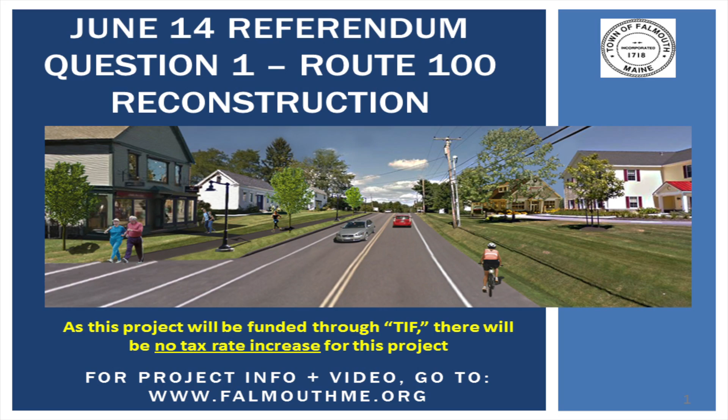Today we want to talk a little bit with you about the Route 100 project. As you know, it's a question on the June 14th referendum, question 1, and we had some requests from people to explain a little bit more about the project, particularly how the project will be financed.

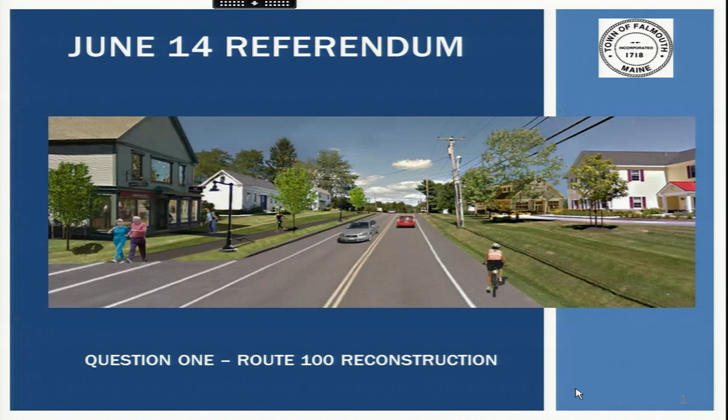We have 3 parts to our presentation: what is question 1 on the June 14th referendum, what improvements are being proposed for Route 100, how much do they cost and how will they be paid for, and lastly when and how is the town going to get the Route 100 project done.

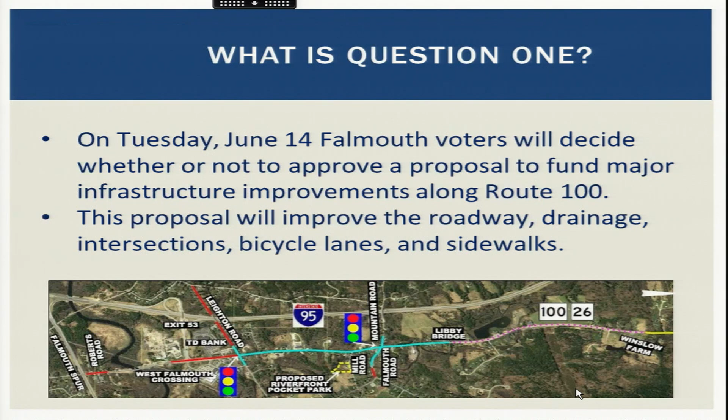So the first part, what is question 1, and what improvements are being proposed. The question simply is for the voters whether or not to approve a proposal to fund major infrastructure improvements along Route 100. Those improvements will consist of roadway work, drainage work, intersection improvement work, bicycle lanes and sidewalks.

What are the current conditions on Route 100? How did this project come about? We have found that the pavement condition on Route 100 has deteriorated significantly. Pavement on Route 100, people may not realize, is very thick, over 3 feet thick of concrete and asphalt that has been added over time. This work was intended to happen in 2009, but it never did because the funds were not available.

This is a state-owned road and the Maine DOT did not have the funds. But in the meantime, Route 100 really is not safe for pedestrians and bicyclists, and the stormwater drainage infrastructure, the culverts underneath the road, have continued to deteriorate. We found that public sewer is not available on most of Route 100. So if Route 100 is going to be reconstructed, it seemed to make sense to add public sewer there as well.

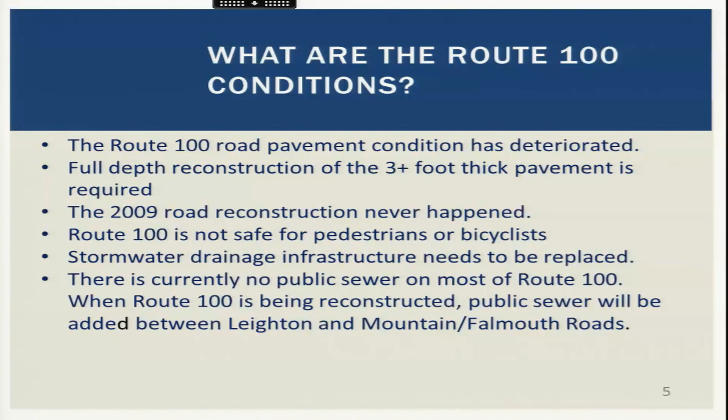So in summary, the town's goals for this project have been fourfold. One is to invest in the infrastructure so that today's traffic and tomorrow's traffic can travel safely along the road. There was an interest to re-establish the sense of neighborhood along Route 100, to be efficient with spending our town money, and to leverage that money with funds from the state of Maine, Maine DOT specifically.

What is the scope of this work? We have a few pictures. The picture shows Portland on the left side of the map, with north running to the right. The key part of the work is to fix the 2 intersections that have traffic signals: the Leighton Road intersection and the Mountain Road, Falmouth Road intersections, with dedicated turn lanes.

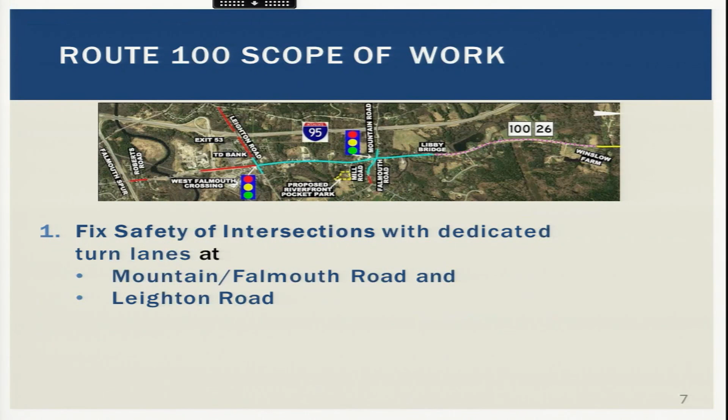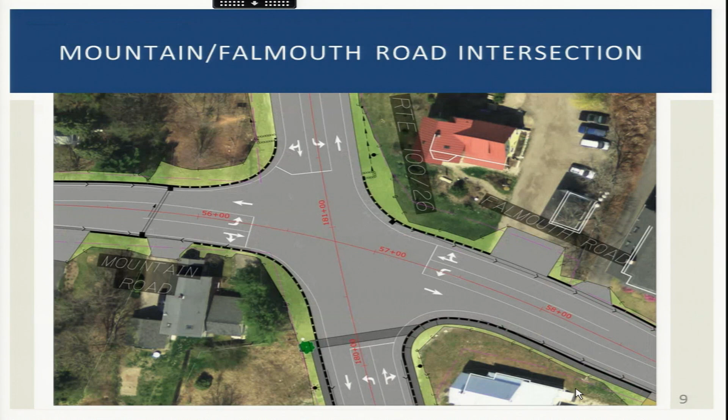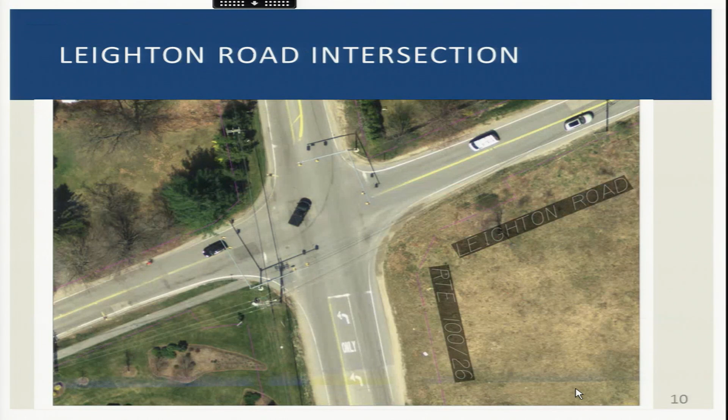Similarly for Leighton Road, this is what it looks like today. You see there's only one dedicated turn lane on Route 100 going left onto Leighton Road, but the proposal would be to have dedicated turn lanes on all 4 legs of the intersection.

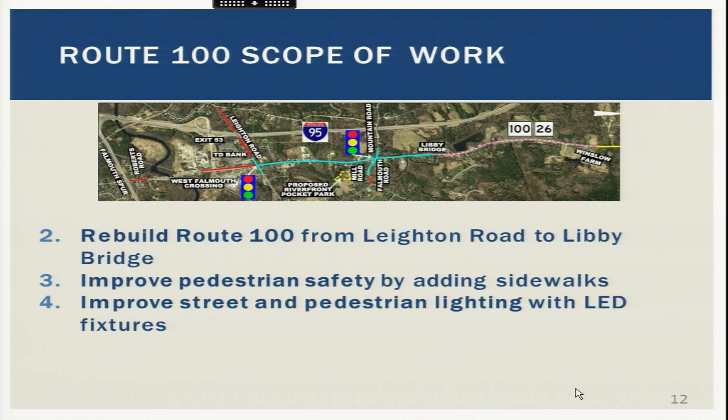Other parts of the work include a complete reconstruction, where you see the turquoise line, of Route 100 pavement from Leighton Road to a point north of Mountain Road that we call the Libby Bridge, to improve pedestrian safety by adding sidewalks. There will be a sidewalk proposed on one side of Route 100 for most of the work corridor.

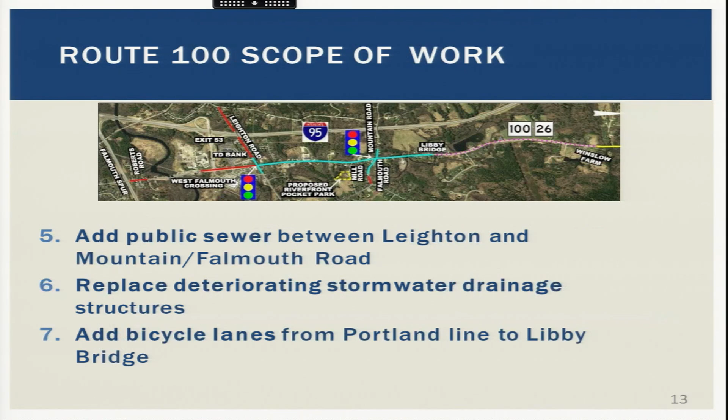Improve street and pedestrian lighting with energy efficient fixtures, and adding, as I mentioned before, public sewer between Leighton Road and Mountain Falmouth Road, fixing the stormwater drainage structure, and adding bicycle lanes from the Portland line, the City of Portland line, to the Libby Bridge. That's it at lightning speed.

The piece that was much talked about by the committee that worked on this project was the section from Winslow Farm to Hurricane Road. That road section also needs work, but it cost $4.2 million and ultimately was decided not to include it because it was too expensive, made the project too expensive, and we could not really afford to do it at this time.

So now we come to the key part of this presentation: how much do things cost and how would they be paid for? The project that the committee and ultimately the town council settled on has a construction cost of about $10.2 million. There are some other costs to the project. One is design.

We had a plan done by Wright Pierce, a concept plan. We had a preliminary plan done by FST Stantec, and that costs money. Also, we propose to bond for this project, which will lead to some interest costs. And those are all identified here in the pie chart.

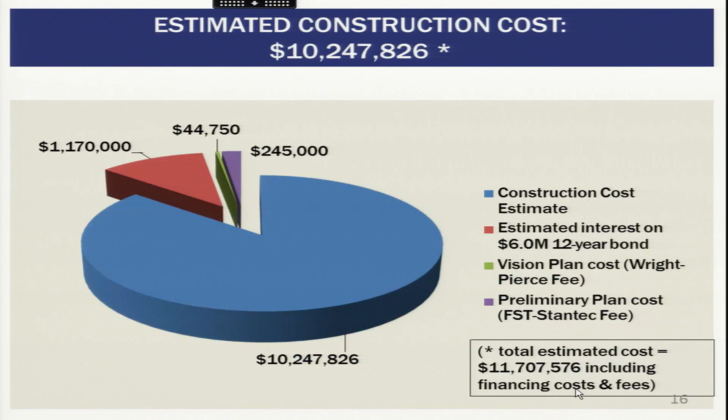What is tax increment financing? That is the vehicle that we propose to use to pay for this project. And people have asked us to explain it in a little bit more detail because it's very technical to some, and people want to wrap their hands around it.

Tax increment financing is typically a specific geographic area in Falmouth. We have currently 4 districts. In West Falmouth, along Route 100, we have something called a tax increment financing district at what used to be called Exit 10. We also know it as the West Falmouth Crossing Tax Increment Financing District. That was established in 1998, for a period of 25 years. It will expire in 2024. It's essentially the complex around TD Bank and Hannaford, which did not exist back in 1998.

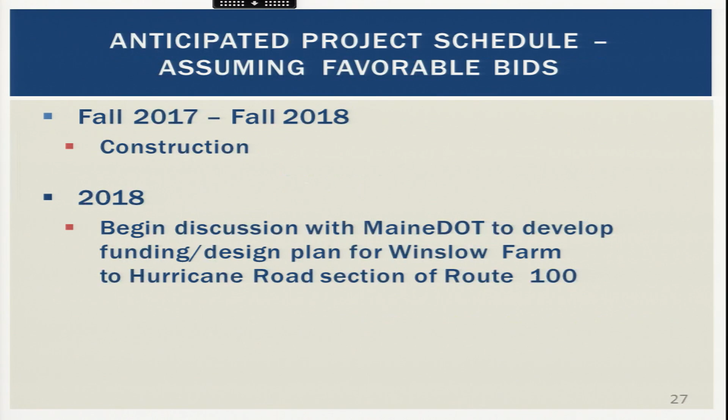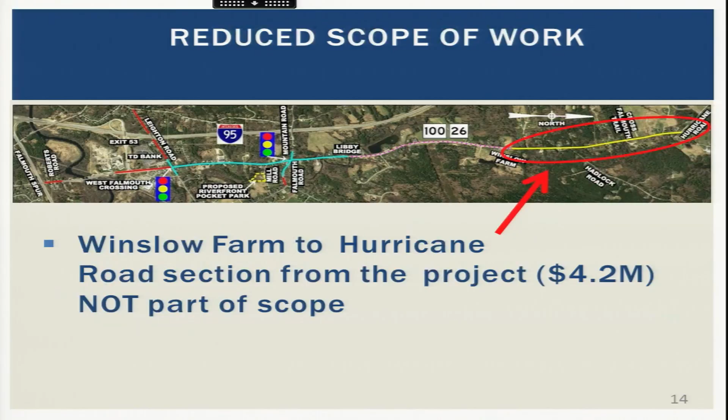Then in 2018, we'll begin discussions with Maine Department of Transportation to develop a design and funding plan for that area of Route 100 that Teo described earlier, a little more than $4 million from the Winslow Farm to Hurricane Road. As he said, that area of the road does need to be completely reconstructed rather than just putting pavement on top of bad pavement. So what we're hoping is that this section of the road will be a future phase to complete. We'll start to look at that in 2018.

The next few slides are an opportunity to give you some before and after photos of what we think the project will look like. This is a view from Marston Street looking south, and the last slide you looked at is the current condition. With this rendering, you can see it's obviously new pavement. You'll see some bike lanes on either side, a sidewalk on the west side of the road, along with some new street trees and pedestrian-oriented, scaled lighting.

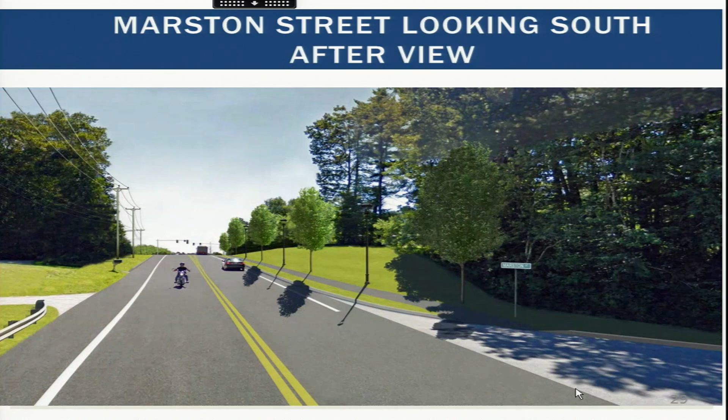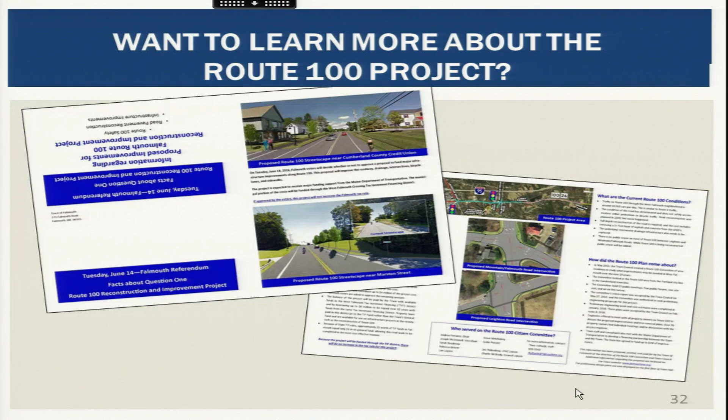As Teo mentioned earlier, if you want to learn more about this project, we will be sending out some factual information via mail in a couple of weeks, and there's a lot of information on our website.

Teo, I'll turn that over to you for the last slide, to describe where people can find more information. Okay, thank you. If you're interested to learn more, you can go to the Town of Falmouth website, falmouthme.org. If you look under government and committees, you can find the Route 100 committee, or search for Route 100 committee. All the design plans have been posted there, the cost estimate has been posted, and this presentation will be posted there as well. So there's lots of information available to review.

If you come into Town Hall, we currently have the design plans hung on the ground floor, with big drawings showing what work is being presented at what part of Route 100. And last but not least, you can contact myself with my phone number and email address, or contact the town manager if you have any questions about the project.

That's really it in a nutshell. We certainly hope that you go to the polls on June 14th, and we hope that this presentation has helped you be more informed about what you're being asked to vote on.